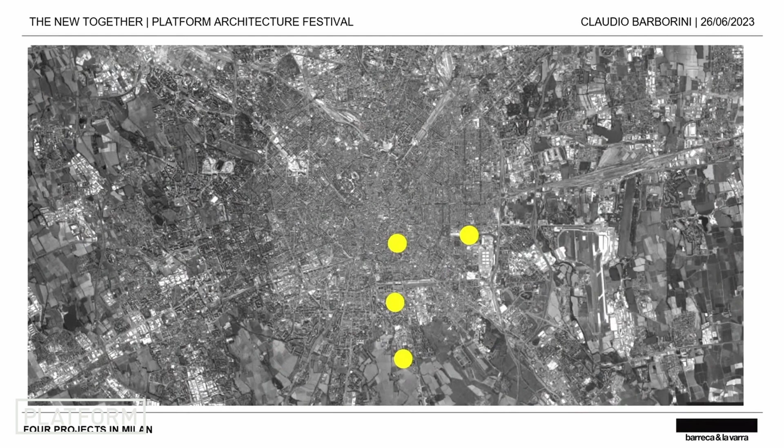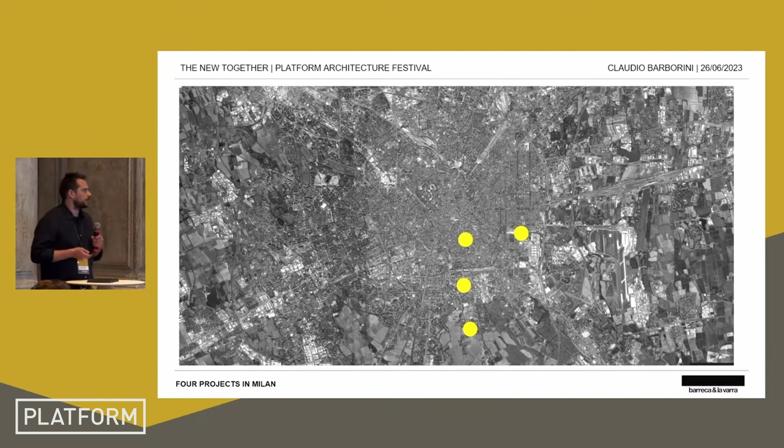The New Together for us is not just one project, but it's how our discipline, architecture and urban planning reacts to an input, reacts to an emergency like the pandemic, reacts to a desire of people to stay together somewhere out of the building. So I want to say some few words about outdoor spaces that in our vision are the connection between people, the connection between cities, the connection between buildings.

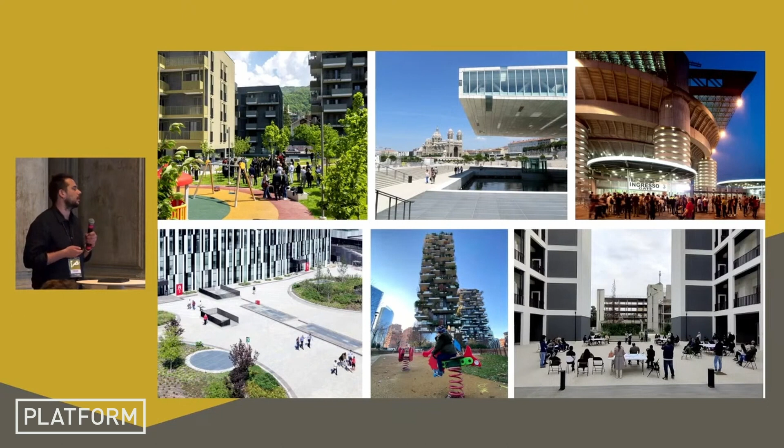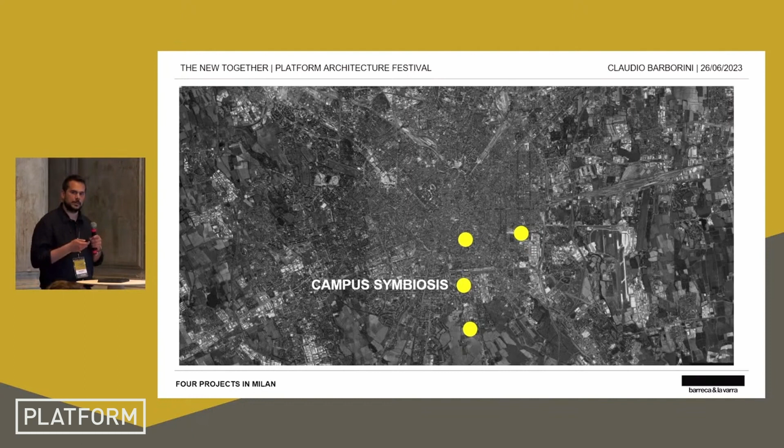And it's the connection that we architects create to make places where people can hang, where people can stay out of their homes, out of their offices. I want to show 4 different projects, different for function, different for typology, different for extension, where the interpretation of outdoor spaces and the connection, so indoor spaces as well, can react in this sense.

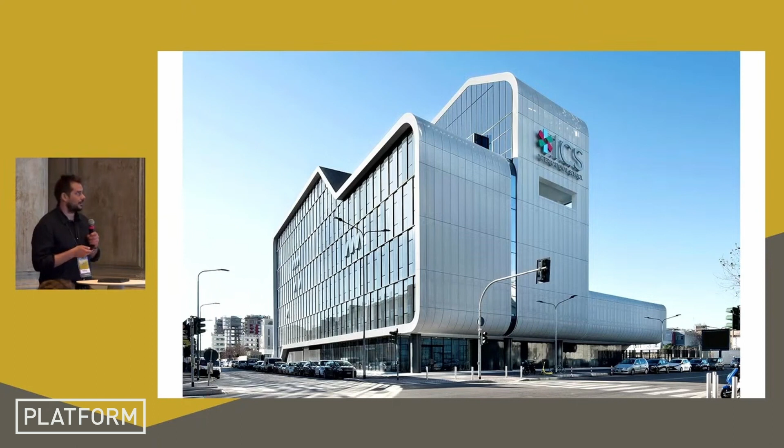This is the ICS School project, ended during the pandemic emergency. It's a school for 900 guys from primary school till high school. And this place is very special for me. I was the project leader of this building.

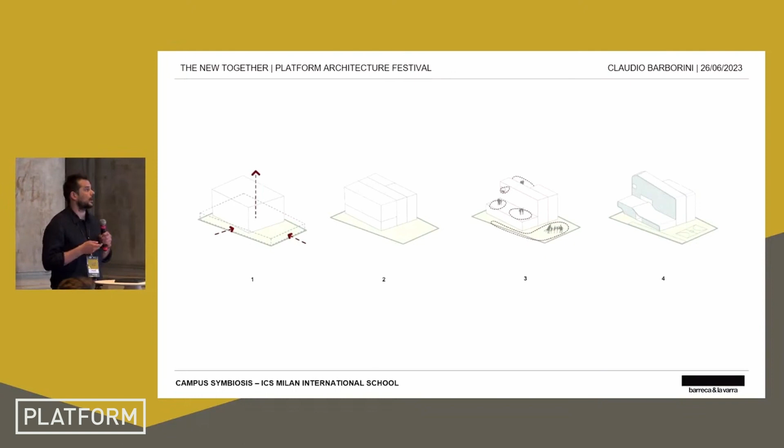And it's done with really basic concepts. The first one was to grow: as the users grow from primary to high school and have more knowledge, they can have a vision over the city from some spaces that are the terraces. Another concept we used was to link all the offer of open spaces inside and outside the school, to guarantee that people stay in different places but all together.

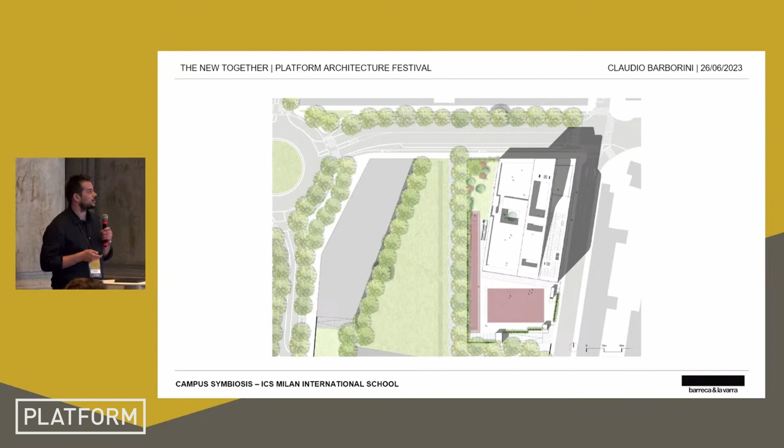This is the site plan. The school is next to a huge park inside the Symbiosis Intervention in Milan.

One of the other principles for the layout of the building has been to anticipate what will happen once I am inside. So from the street, I see the reception, the hall, the lobby, and once I am in the lobby, I can see the bridge that is inside the building and links the elevator to the auditorium. Once I go toward the elevator, I can see the gym, I can see the swimming pool, I can see the auditorium, and once I am inside the gym, inside the swimming pool, I can see outside under the glass facade that we designed all over the space.

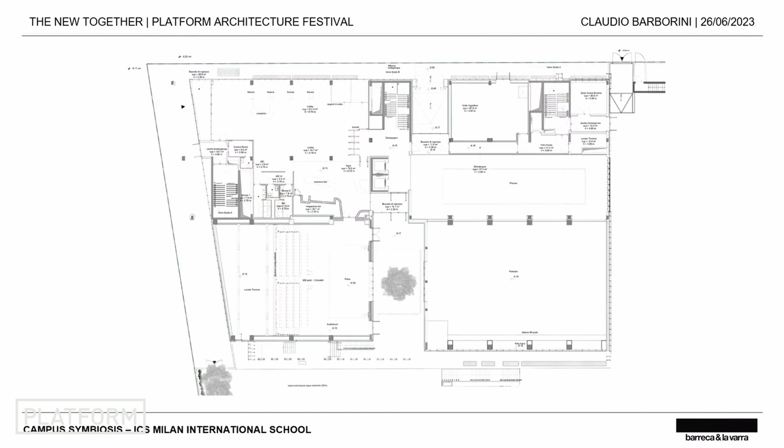So these are a few images to understand what I was saying. So this is the hall, and you see on the left the bridge. The bridge connects the elevators with the auditorium.

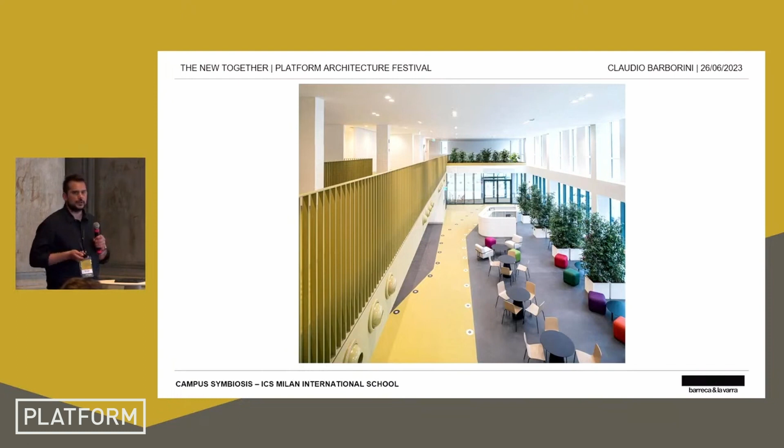These are the vision that we had of the public space, because the hall is not just a reception. The hall is a space where we can sit and have a relation between teachers, students, parents, and these are all the social spaces.

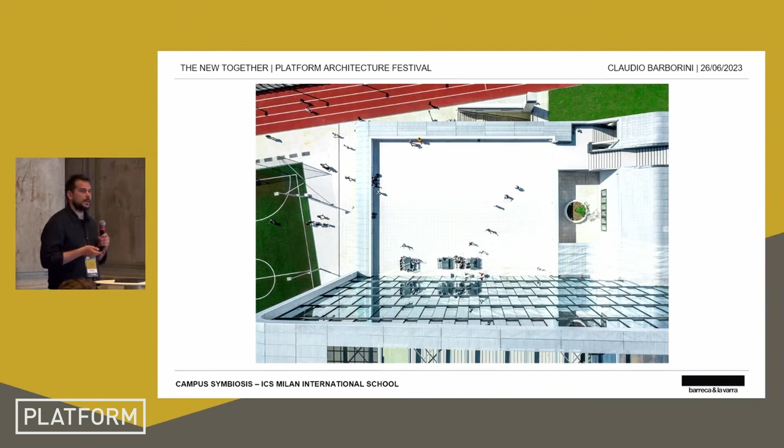So the gym, and I can see outside the garden, the swimming pool as well, with a natural lighting system. And these are the terraces that face the public space, the external public space, with a basket field, the corridor that makes the link between the patios, the terraces, etc.

So once you look at the building, you can see the privileged point of view that you can have once you are inside. So this is the link with the city.

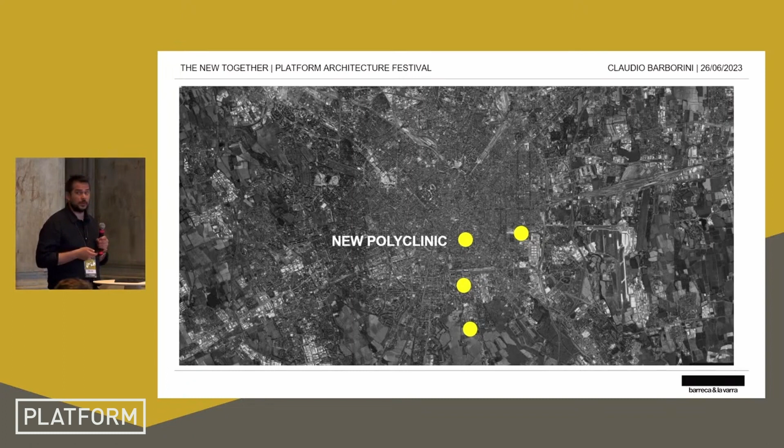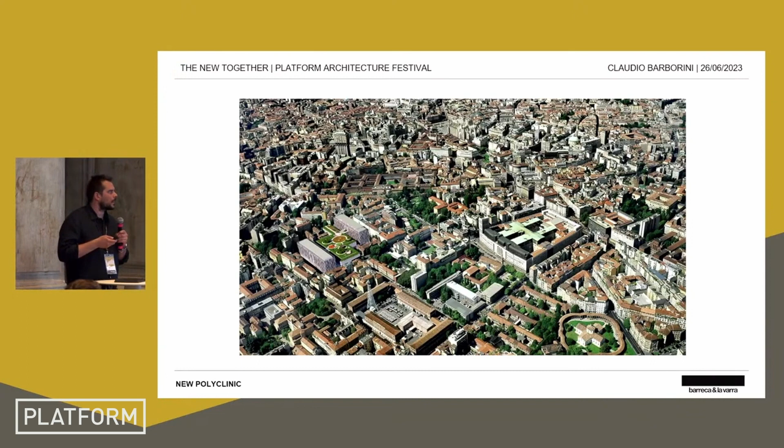But the problem was that we had to guarantee also the fluxes between and beneath the building.

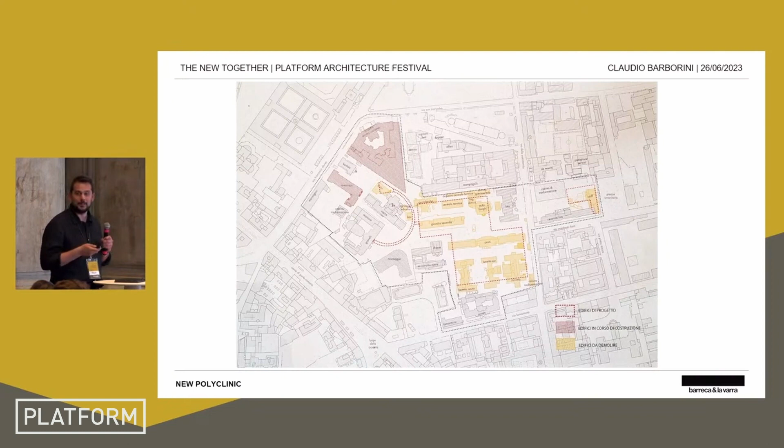So we tried to ask how we could guarantee the public space and the historical fluxes inside the area. We decided to make two simple actions. The first has been to raise up the building, creating a new gallery that crosses the site.

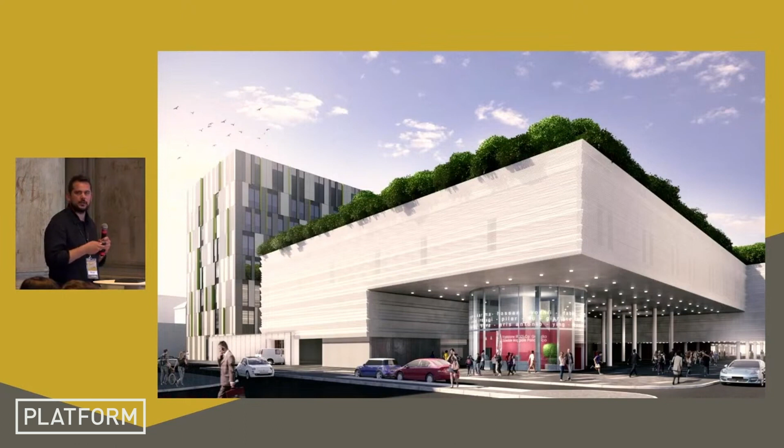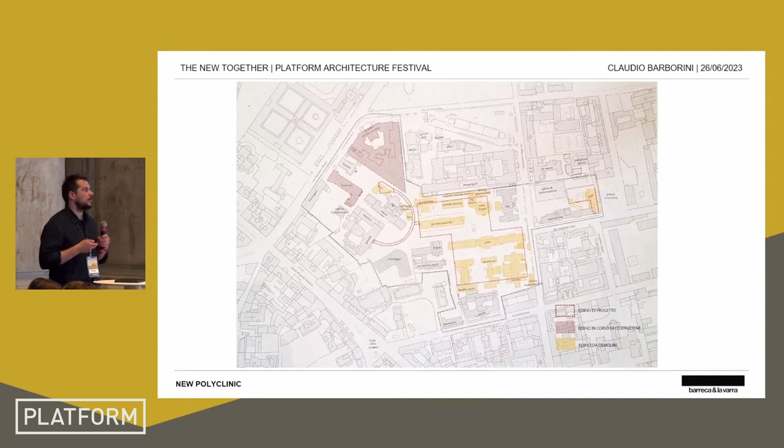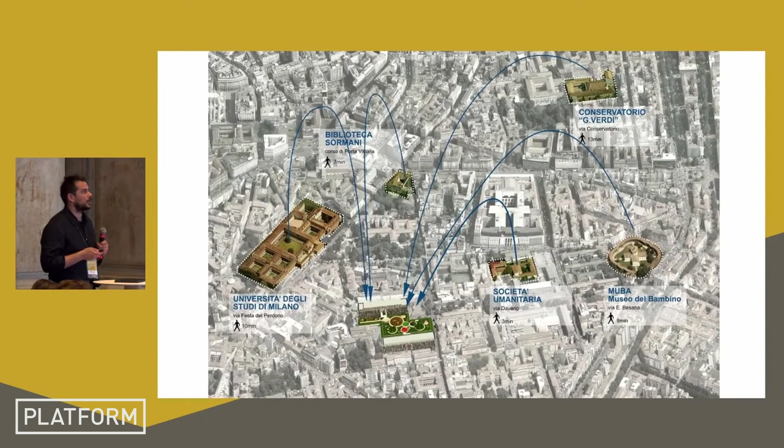The second decision has been to create a green rooftop, a 7,000 square meter green rooftop accessible by the hospital community, but also by the citizens. These two strategies made a little piece of the puzzle inside the historical city, where we could dialogue with other situations you see on this slide.

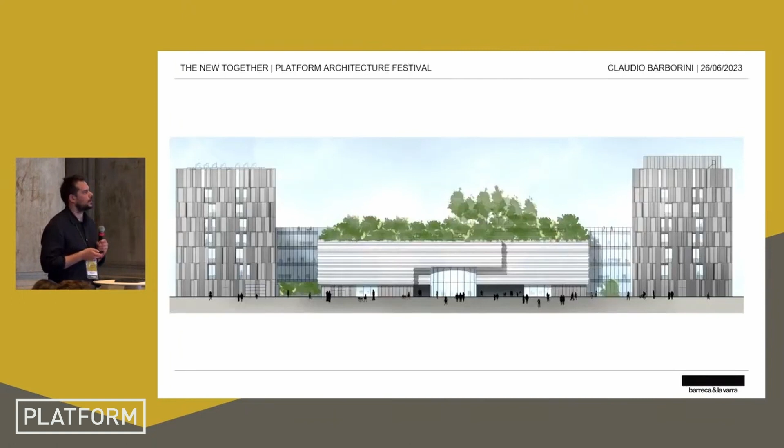Now you can see the new project, and you can cross east to west through the site plan. On top you have the 7,000 square meter park, accessible by everyone.

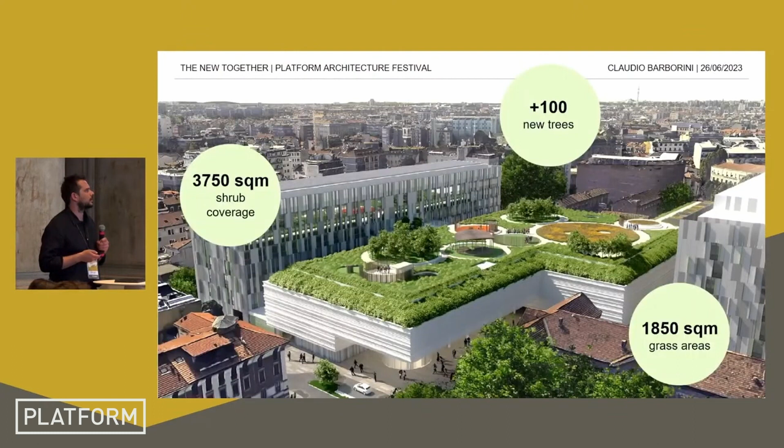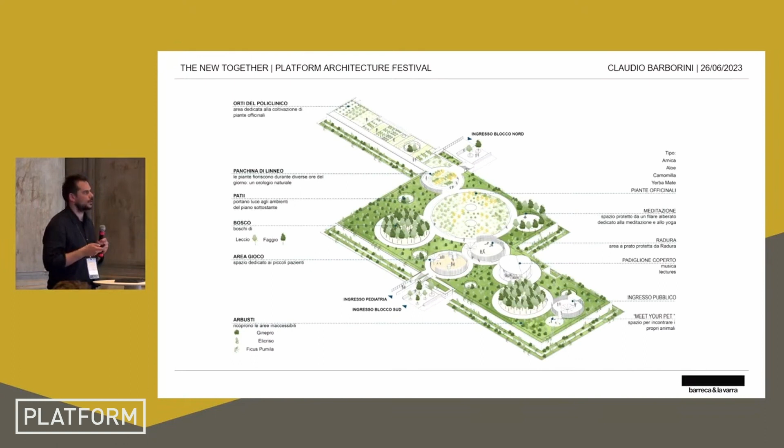These are some images. It started in 2007, I guess. And this is the layout of the rooftop with different functions for different uses and users.

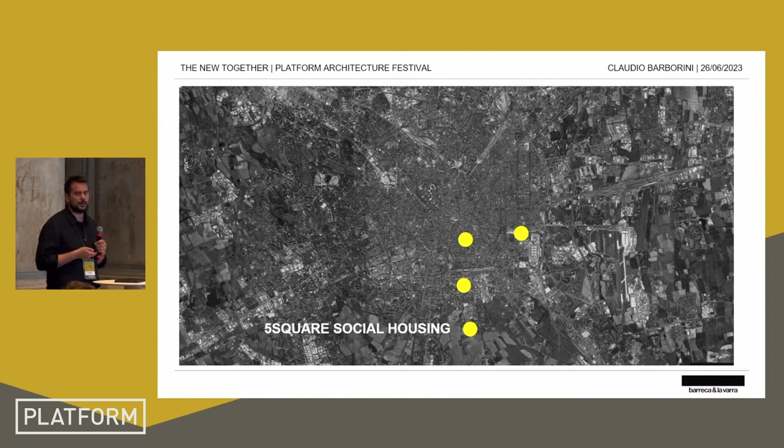This is another interesting project, a social housing project that we designed for Redo, one of the biggest developers in Italy for social housing functions.

We had to operate in an existing situation because there were 5 buildings that never finished construction. It was an office master plan that never saw the light. It started in 1985, and then in 1995 it stopped when just the main structure was complete.

Once Redo took over this master plan, we had to insert a totally different function, because we started with a layout made and optimized for offices, and we had to insert residences inside.

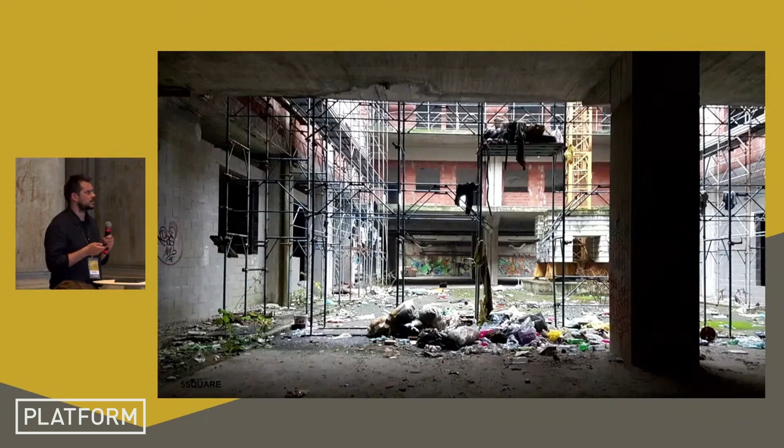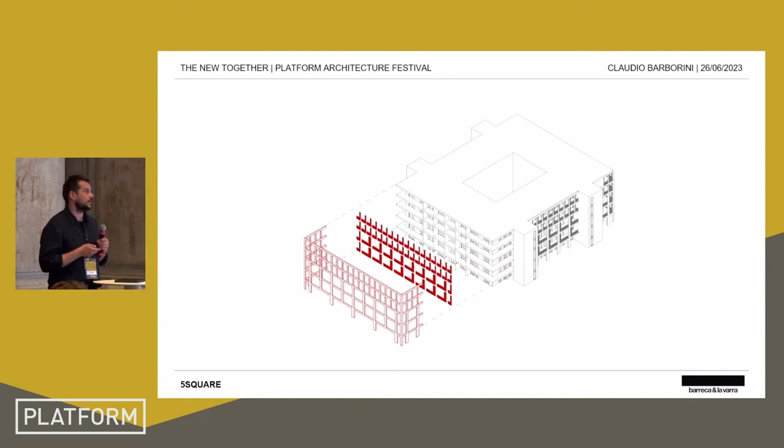This was the situation at the very beginning of the master plan. We analyzed the existing structure and saw long balconies surrounding it, and 5 courtyards that originally could function like standalone devices.

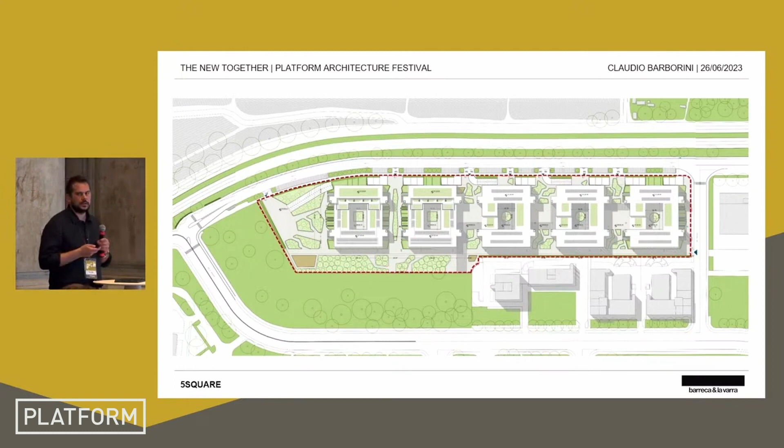We decided to demolish just a few parts on the ground floor because we wanted to link all the courts and create spaces that could activate not just the master plan but the whole neighborhood, attracting people who lived in the surrounding context.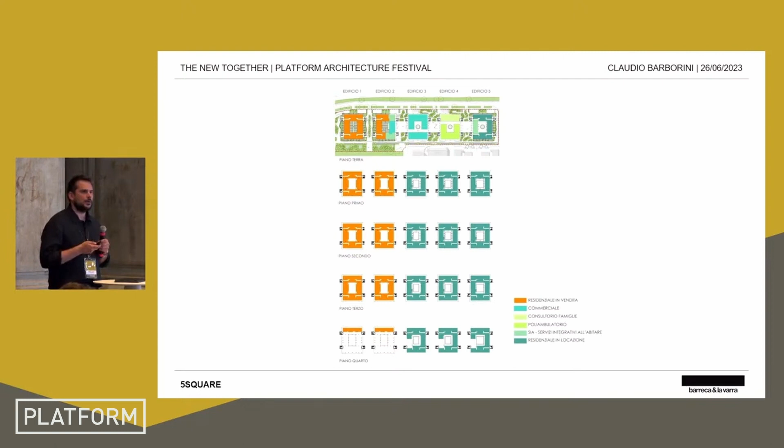And this is the result of our exploration.

The last project, since I'm finishing the time, is Ex Macello. We won this competition, it's a Reinventing Cities competition — actually the second one we won — inside a production site for meat treatment in Milan.

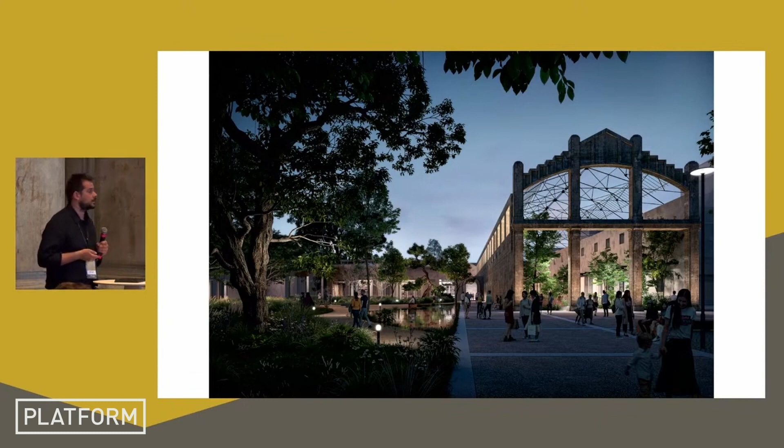It's a huge area, 150,000 square meters. It was a production site, so it was totally impermeable to the fluxes of the city.

We decided to react to this condition by demolishing all the boundaries. We had to work on the boundaries, and decided to make the site permeable, using the existing buildings together with new ones.

The historical function will be university, research points, a pod, fab lab, and so on, and the yellow areas will be residences, for free and for rent, etc.

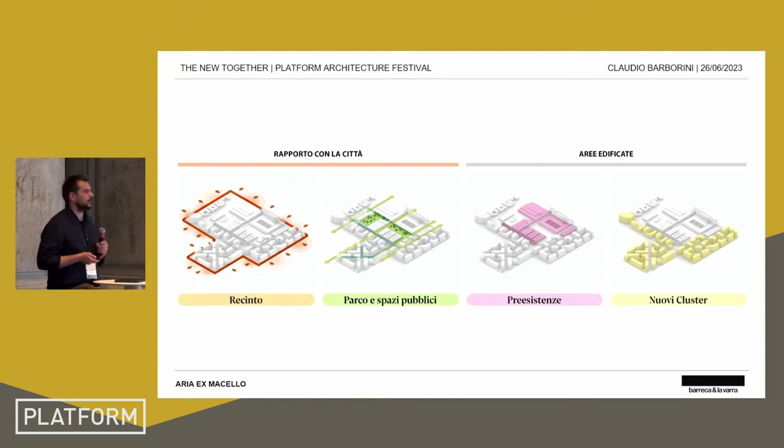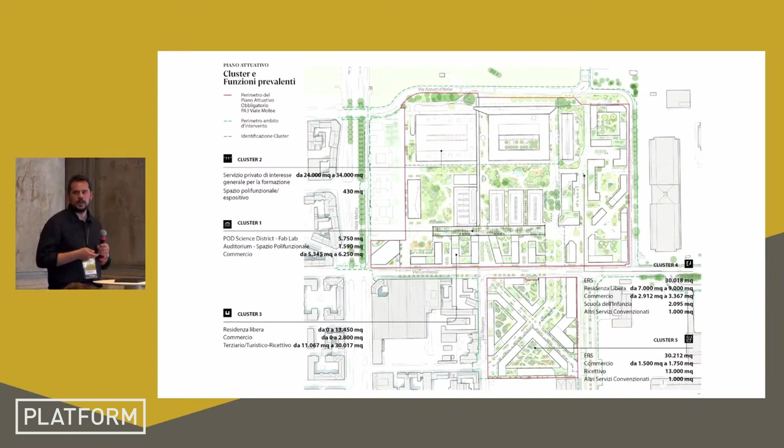The result has been the distribution of public functions inside the ground floor of the buildings, trying to put the most public functions toward the public space, creating, in a certain sense, shades of privacy — so people understand they're in a private space, but still a public one, not using fences but just functions.

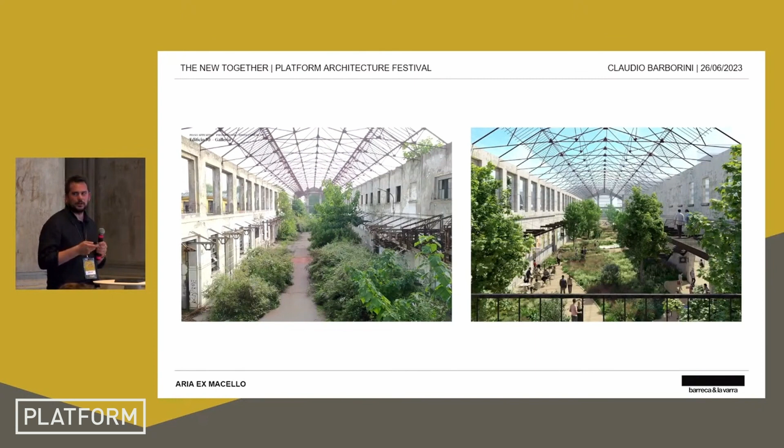This was the main driver our client gave us. This is the result: huge external spaces, indoor and outdoor, who knows, but that connect all parts of the site. And these are some suggestions, before and after the design.

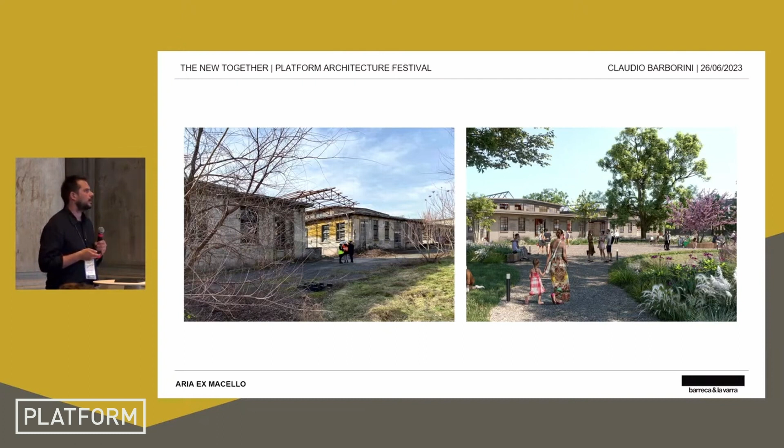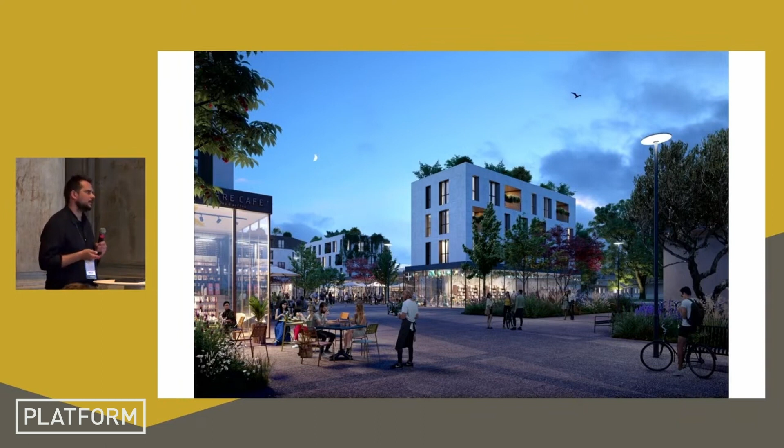It will finish, I hope, in 2030. This is the kind of public space that can be used in daytime but also nighttime, trying to give a checkpoint also to enter the public space.